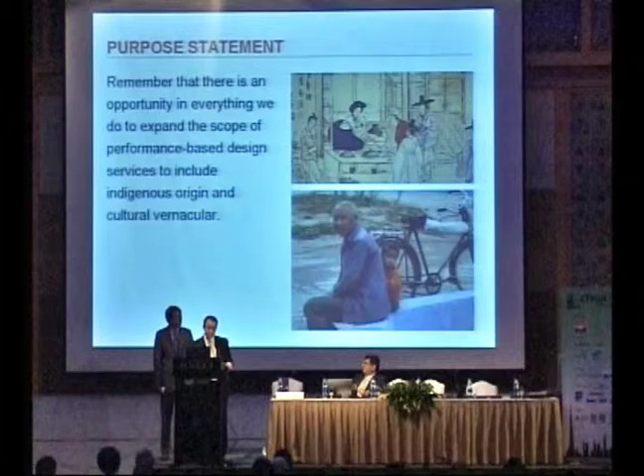Similar to some of Ken Yeang's conversations this morning, each design embraces concepts for natural ventilation, vertical diversity, greening of the skyscraper, though I think as you'll see in our examples, it's more internal than external, and cultural adaptations. If you remember one thing as you leave here today, it is possible to balance the cultural vernacular and the indigenous nature of architecture into modern high-rise construction.

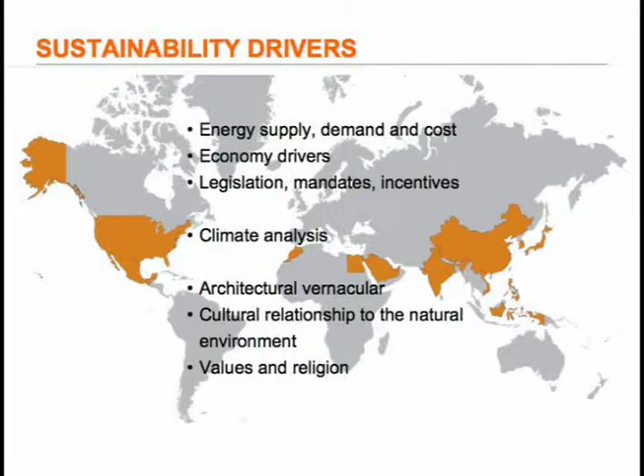These are some of the drivers in the world today. The markets that Callison itself works in are all the countries in orange, and there's a lot of similarities within those markets. We've heard a lot of statistics today in all the presentations. Here's one more for you. According to the United Nations Population Fund, by the end of this year, 2008, half the world population will live in cities. And by 2030, the developing world will be home to 80% of the world's urban population.

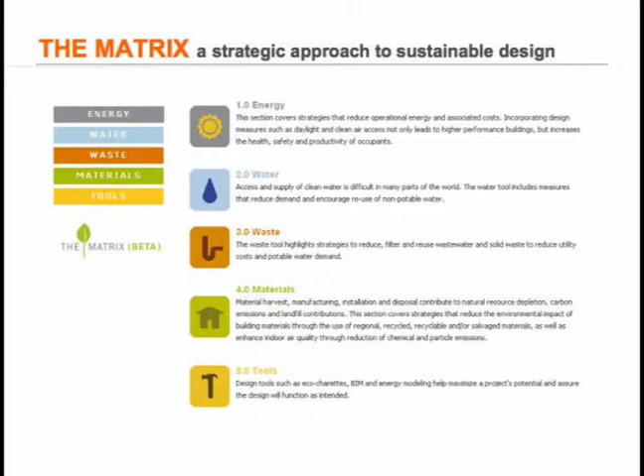Some more scary statistics. To help us manage and understand our sustainable design approach, we've created what we call the Matrix, and different than the Hollywood version of the Matrix, ours is a tool to help us understand sustainability all through our office. There's 5 key drivers for us: energy, water, waste, materials, and then of course the tools that we use. If we dive into one specifically, the energy, that quickly brings us into a myriad of opportunities for specific design applications to projects.

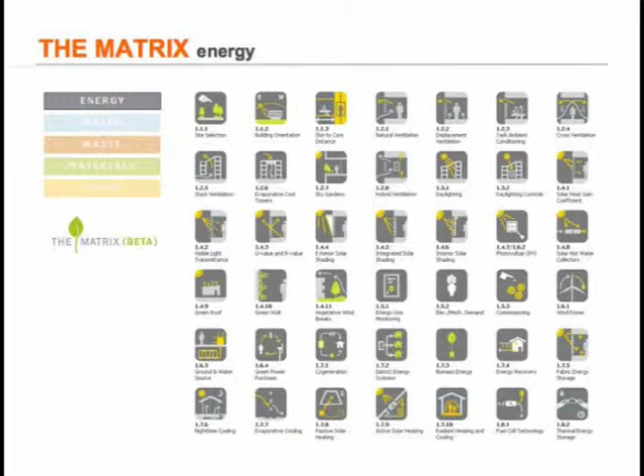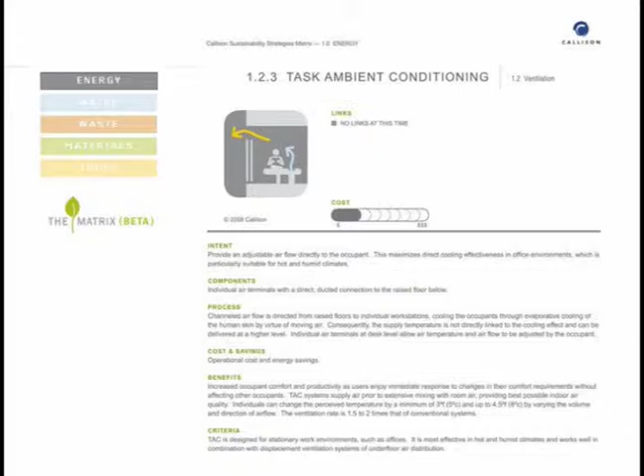Now, I will not bore you with the details of this, but if you drill into any one of these, you get into specific conditions. We have references on our website that go direct to best practices publications, ongoing research within the office, and other projects that are being done in the world. So it becomes a fabulous tool for us and our clients to learn what the best sustainable applications are for the individual projects. I'll let Matthias get going here right away onto the projects.

South Korea is the 4th largest economy in Asia. It belongs to the world's most technically and scientifically developed countries. Strong economic growth, past projected energy demands pose great challenges to the well-being of the nation, well-being but also economic stability. The imperative is to focus on local, culture-specific solutions that mitigate the dependency on natural resources.

Traditional Korean lifestyles and dwellings have evolved over many centuries, allowing societies to adapt to seasonal and climatic changes. Cheap fossil fuel as a universal source of energy supply has replaced traditional methods which stem from a reaction to the constraints of the natural environment. Architecture and urban design have a mandate to help us find solutions against those problems. What are the cultural values that are truly Korean? Let's take a look.

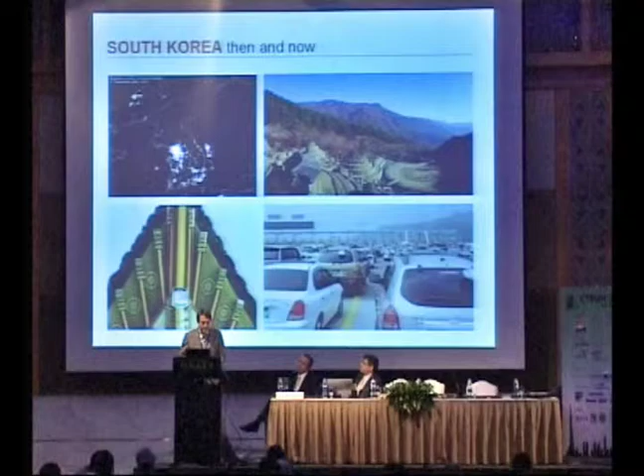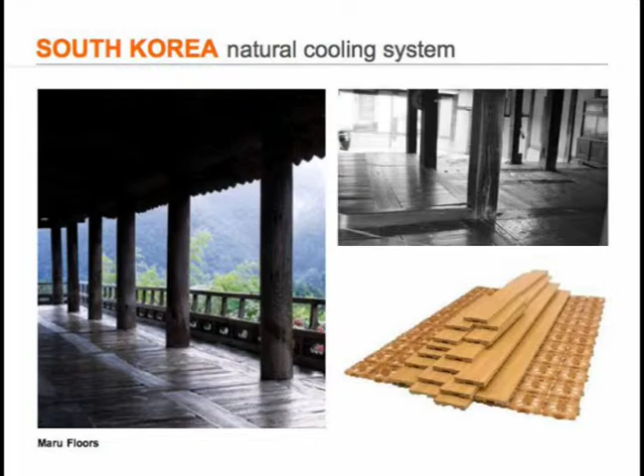Airflow-guided heating and cooling systems in Korea are part of the culture and are part of the architecture. Maru floors, similar to a veranda, guide air naturally under the floor over a shaded, veranda-type surface, to the interior of the residence. This is important: air was guided naturally through the building.

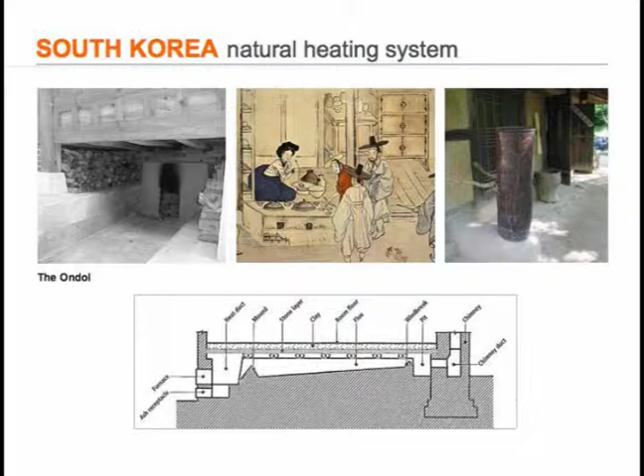The Ondol system is a traditional Korean underfloor heating system. Heat is generated at a furnace outside the building, then the heat is used for cooking inside, then the heat is passed laterally to exterior chimney flues. In this process, heat is being transferred to a clay-tiled floor and radiated back into the residence. The importance here: heat was stored and radiated back over time.

Interstitial buffer spaces between dining and kitchen rooms are a very Asian, but specifically a very Korean story. They were used as thermal buffers; traditionally they were used as places to store food and to dry clothes. And today they are considered a leased amenity. They are considered a bonus space, and in their function they act as climate buffers.

Similarly, our building design incorporates window gardens that act as buffers to pre-temper outside air to interior temperature requirements. Let's take a look at our tower design.

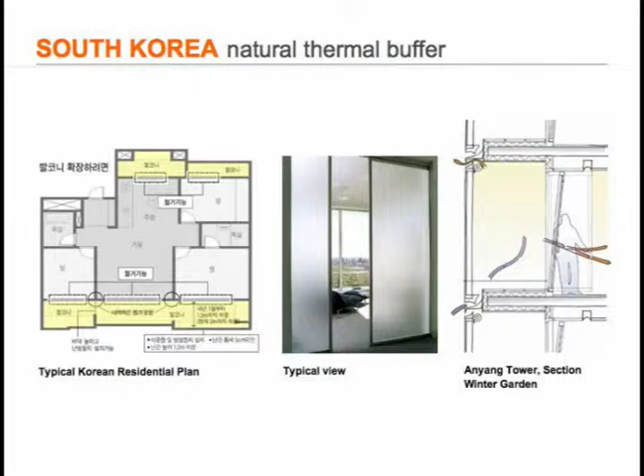At 79 stories and 294 meters tall, ANYANG Tower is comprised of 230 residential units and 66,000 square meters of retail and hotel amenities. Sky gardens at every 7th floor clearly distinguish this tower as a breathing element, communicating environmental connection, performance, and health. This was important in the design brief.

The site is located just 30 miles south of Seoul. It sits on top and is connected to a metro station underneath. Part of our scope is the Eco Park you can see in front of the retail base here. This Eco Park is partially owned by the city of ANYANG, and we provide landscape services including the incorporation of a hypermarket featured here.

The residential tower is naturally ventilated. For us, in a high-rise building, that means capturing air strategically at air terminals. You can see from the diagrams at the bottom, the hottest months in ANYANG are from June through September. It's those months that we as architects are worried about with respect to cooling.

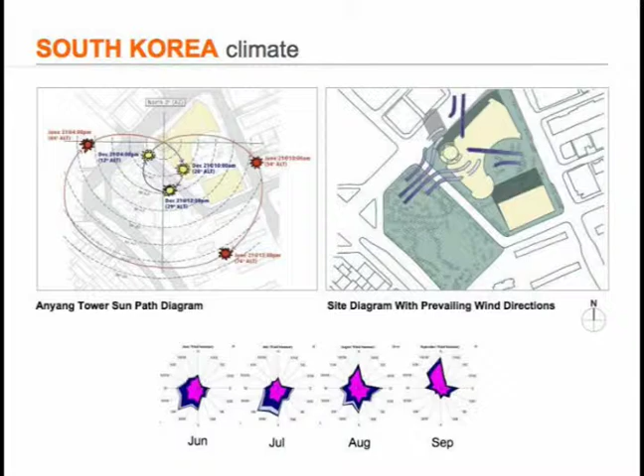So in the upper right diagram, we orient our tower to capture prevailing wind directions, which are from June to August from the southwest, as shown in the diagram, and from August and September from the north and east directions.

This was relevant to the design in the following way. The diagram on the left shows a partial section of this tower's progression. What you can see is a strategic air intake at every 7th floor. Those are the locations for the sky gardens.

Two forces apply: first, you have a luff and a lee wind condition outside the building. Second, you have thermodynamic uplift within the riser. Those two control the air speeds within the negatively pressurized shafts.

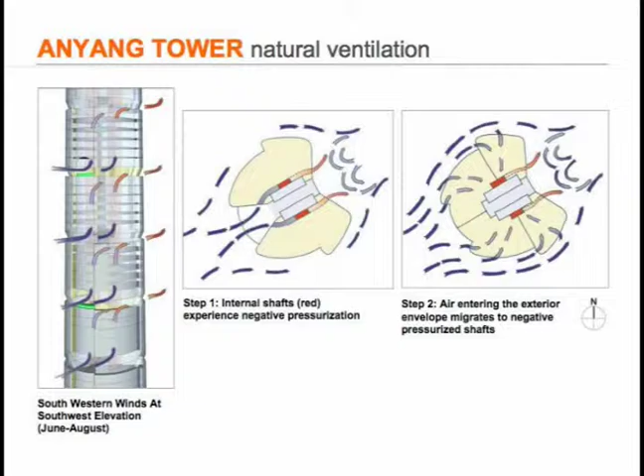If you look at the right-hand diagram, the moment I open the exterior on the residences, you see a plan view with 4 residences penciled in. The moment I open this envelope, I achieve cross-ventilation by air migrating from outside to those red spots, the negatively pressurized shafts. The purpose of this is to cross-ventilate, closely related to the vernacular we looked at previously, the Ondol and Maru floor systems.

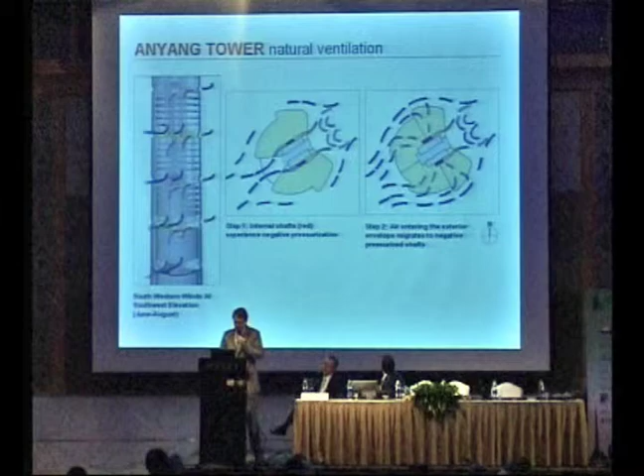Diagrammatically shown here are three typologies for various building orientations. On east and west facades, we have a two-layer wall. This two-layer wall is a floor-to-floor glazed ceiling and allows wind gusts to be mitigated due to the high-performance spec that this type of construction brings.

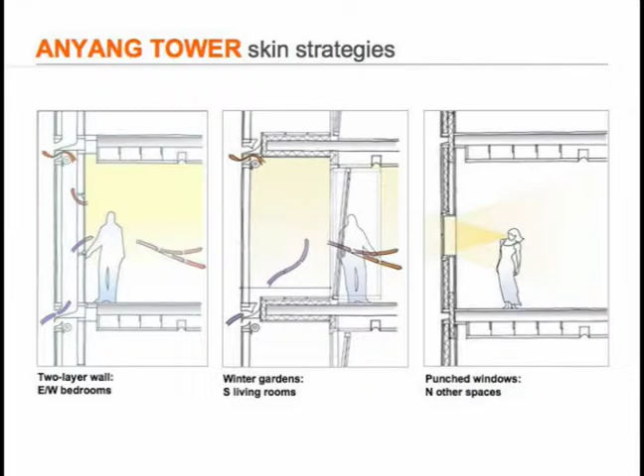It also allows control of solar gain, temperature, noise, and condensation. The center diagram shows the winter gardens. Importantly, in spring and autumn, those winter gardens pre-temper cooler outside air to warmer inside temperature requirements. This is a non-heated winter garden space. In summertime, they act as heat shields to prevent heat buildup in the interior of the apartment.

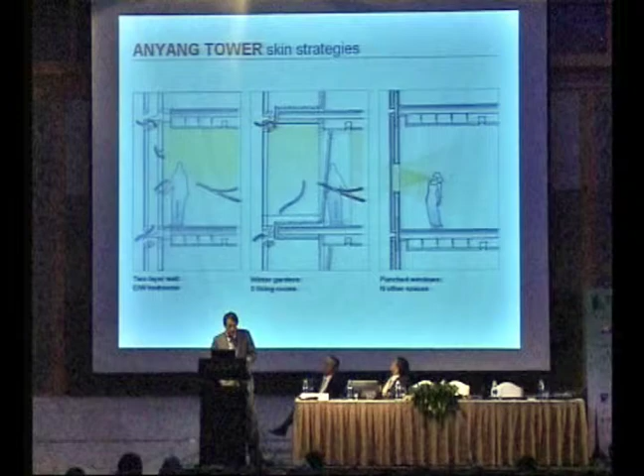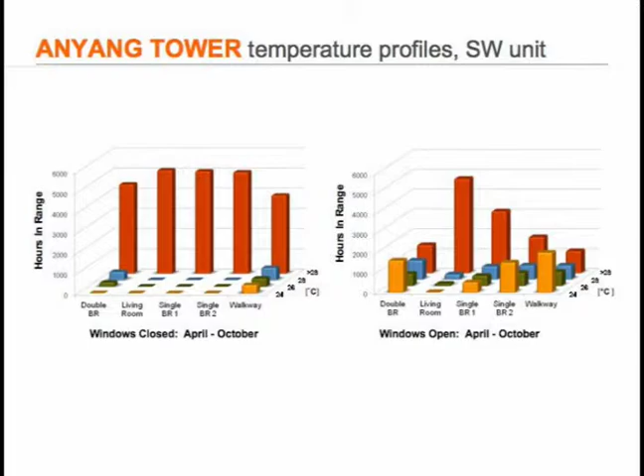The tower has a retail podium. In the interest of making this feel like a green building, it was important to look at public-use spaces such as the retail lobby. We have a 5-story retail lobby that is naturally ventilated, taking air in at low and exhausting at high.

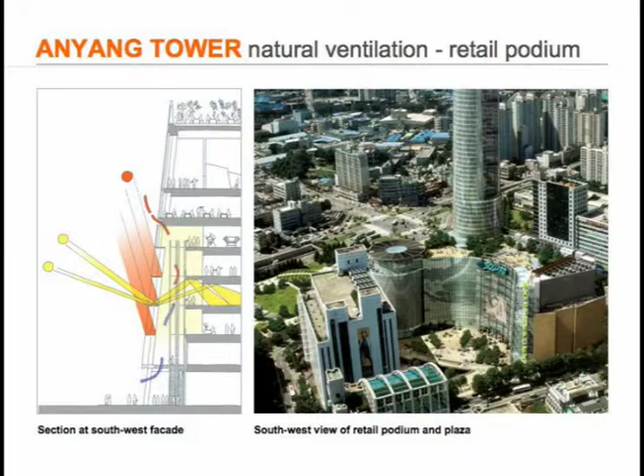We have a 2-layer wall with integrated light shelves to prevent heat buildup and solar heat gain inside during summer sun altitudes, and to deflect daylight deep into the retail spaces using the winter sun.

This concludes our project review in South Korea. Let's take a look at Vietnam. Vietnam is a nation with the fastest economic growth rate among countries in Southeast Asia.

The drivers for sustainability are different in Vietnam. They have to do with basic life quality issues such as the elimination of brownouts, or access to clean, fresh, potable water. They're very real needs.

Going forward, incentive programs are needed to emphasize renewable energies, clean water supply, and clean air.

Let's take a look at the culture. Traditional Vietnamese lifestyles have evolved over many centuries. Conflicts, colonization, occupations, and wars have left tears in society. However, they have also created a very adaptable and flexible people. The cultural mending has been eased by legislation that led to strong economic growth in agriculture, manufacturing, construction, housing, and in our case, foreign investment. The embrace of principles that support sustainable growth will need to follow.

What are the cultural values that are truly Vietnamese? Let's take a look. The Áo Dài is a beautiful, traditional Vietnamese dress. It is characterized by simple, bold lines that separate an outer from an inner layer.

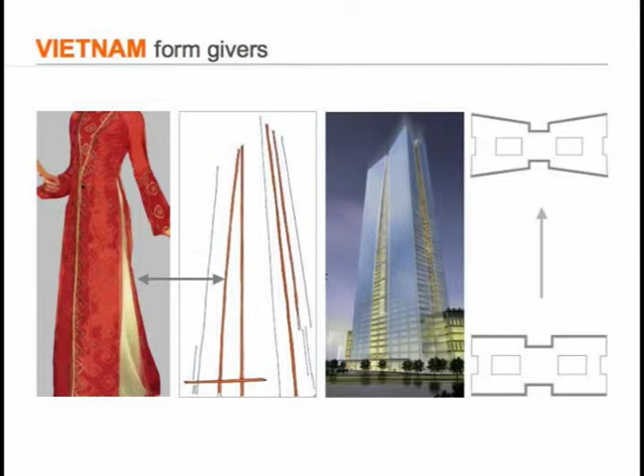A typical residential floor plan shows you that 8 units are separated into 2 sets of 4, separated by the sky garden. The sky garden is a through-space; it punches through from front to back, and is the entire height of the tower. The sky gardens are 4 stories for the offices and 6 stories for the residential. Due to the geometry and configuration of sky gardens with respect to the residential units, we achieve a perpendicular exterior wall layout for each of the 8 residences so that cross ventilation is assured.

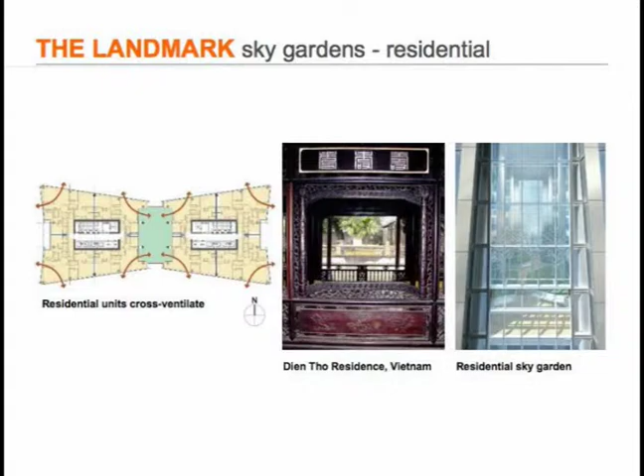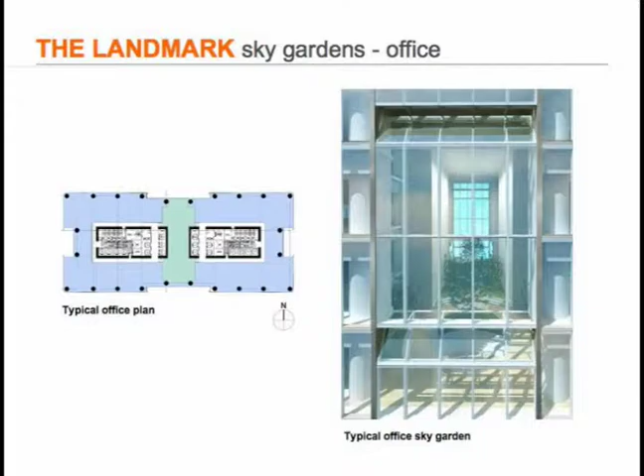You see the office tower plan. Central to the tower design, they create a place for socializing, free of columns and service cores, symbolizing civic openness and transparency. In the context of Vietnam's war-torn history, this central spine symbolizes the healing, mending, and unification of modern-day Vietnam.

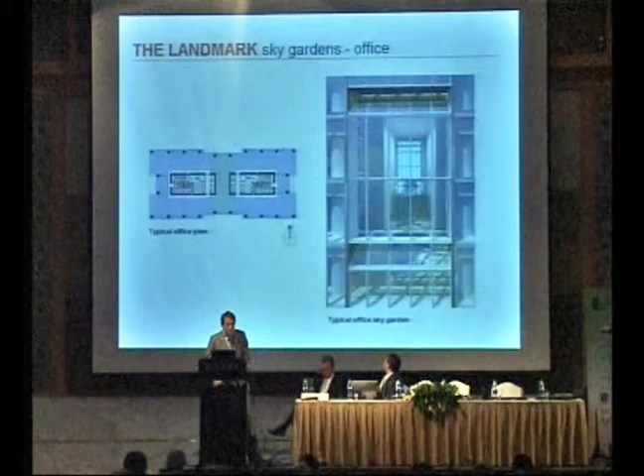The mitigation of downdrafts on the tower building is of concern, and our response is a very clean, simple, elegant solution that complements the overall shape, form, and expression of the tower.

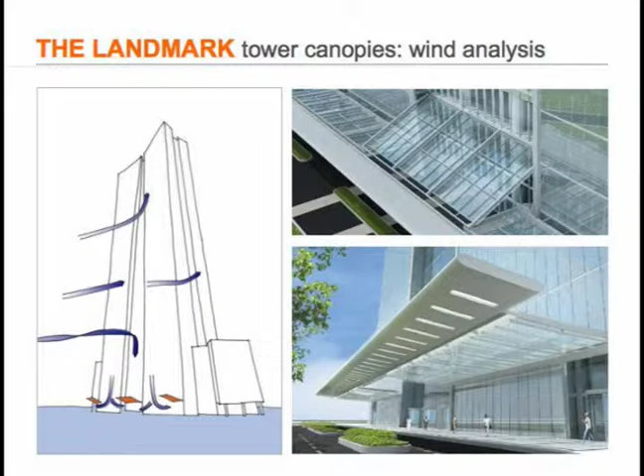The building has no connection to the sewer system or sewer infrastructure. As a result, all wastewater is collected in the basement and processed with a biomembrane reactor. Water is captured in a tank, sludge is collected periodically and shipped off-site for pellet processing for use as fertilizers. The remaining clean water is a Class A effluent, which will serve as gray water use within the tower building.

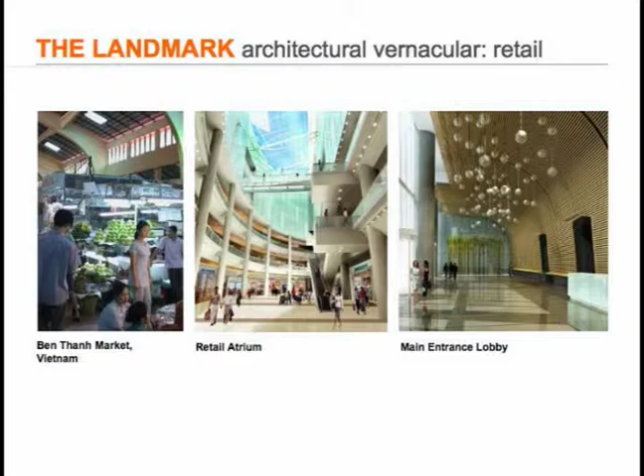The traditional Vietnamese market follows the Southeast Asian market archetype, depicted here on the left-hand image, with high cathedral ceilings to afford cross-ventilation, allow odors and heat to rise, and let daylight infiltrate. It's those principles that were taken over and applied in the images depicted here, the retail atrium and the main entrance lobby. In summary, this is what I want you to take away.

In my experience, indigenous climate solutions improve architectural performance of modern construction twofold: it reduces the energy demand, and it connects and relates to the local people.

So 3 takeaways we'd like you to leave with today that are really critical. First, sustainable design is here to stay. We've seen it in all these presentations, you're seeing it around the world. It's not just a fad, it's really driven by business and environmental concerns.

Secondly, invest in the business case. Sustainability has to make sense, and it can make sense if you apply it correctly. And third, it's critical to understand the place. Peter Rees talked about it, Ken Yeang talked about it - understanding the place, the culture, the vernacular of the society that is there. Blend that with sustainability and the business case, and you can have great projects.